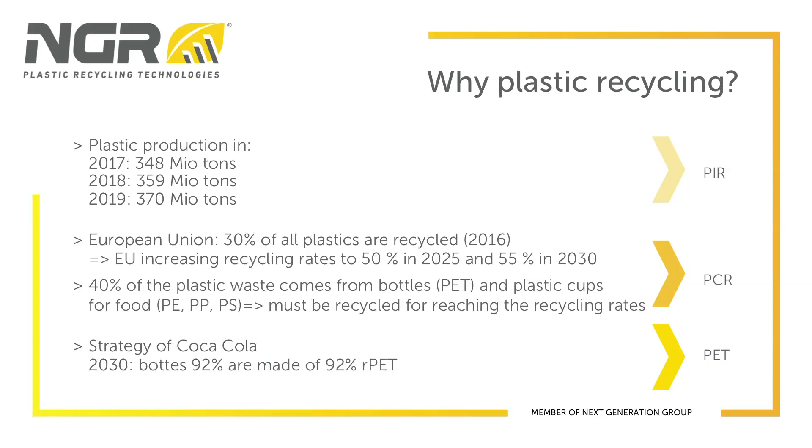Therefore, we believe that although there's a global COVID pandemic and the political focus is a little bit turned away from environmental issues, it is very important to talk about plastics recycling. The production of plastics during the past couple of years increased steadily, and it doesn't look like it becomes less, even though the European Union starts to ban straws and other one-use plastic products. We still have to work on the recyclability of these products.

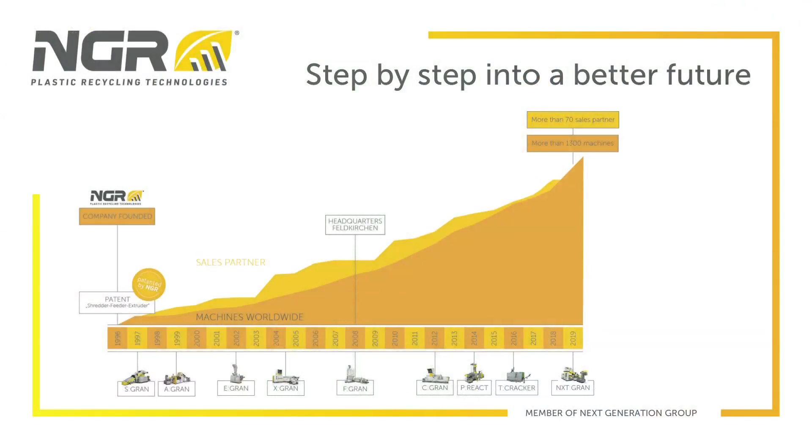From that time on, we developed 9 different systems for separate applications in the recycling industry. So beside industrial waste, post-industrial waste or PET recycling, we are focusing today in this webinar on the post-consumer segment. As already mentioned, NGR's headquarters is in Feldkirchen, Upper Austria. This is the place where all the machines are developed, designed, manufactured and delivered to our customers worldwide. Besides our headquarters, we have a subsidiary in the United States for customer care, sales and service, as well as in Malaysia and a sales center in China.

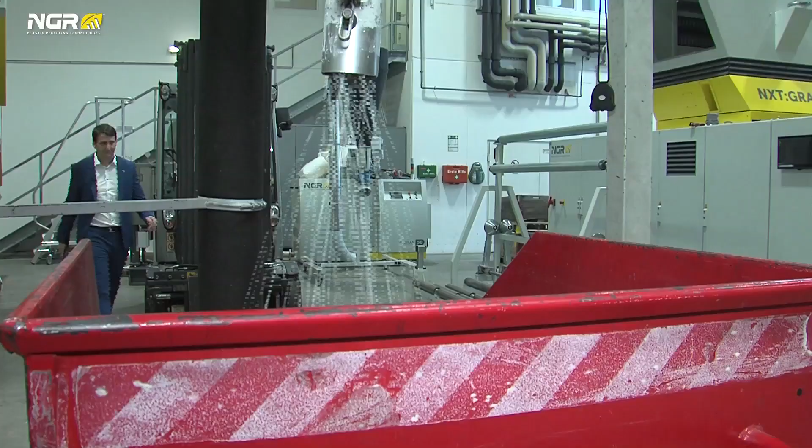We are now here at NGR's Post-Consumer Recycler Test Center. As mentioned before, NGR supplies a wide range of plastic machineries, which are split basically into 3 different segments. The first segment is the PET segment, where we have our specialized P-React, working with a liquid state polycondensation technology in order to enhance the intrinsic viscosity of PET and to clean the PET melt in order to achieve food gradability.

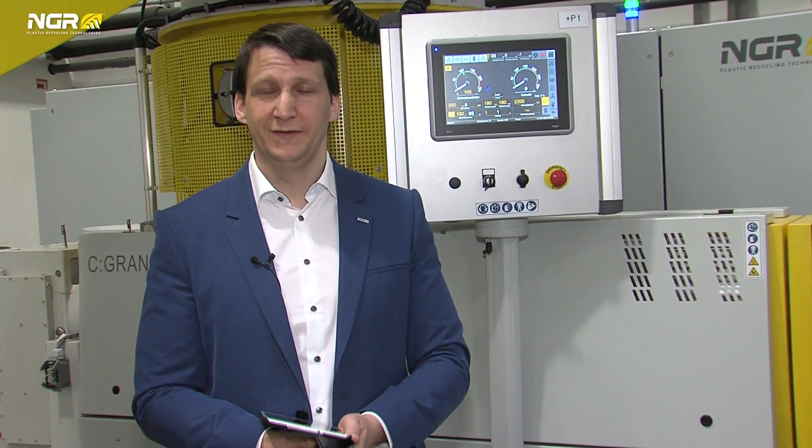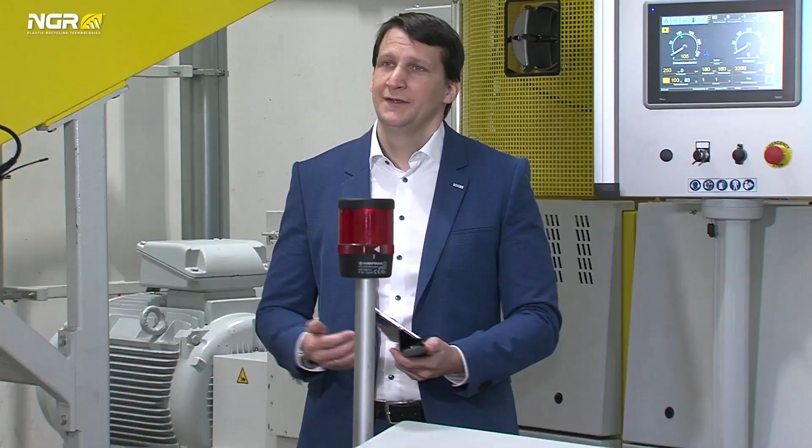The second segment is our post-industrial recycling segment, where we develop and manufacture machines specialized for in-house applications. This means if a plastic processing company producing films or other plastic products has a certain amount of in-house waste, these machines are used in order to recycle the in-house waste into high-grade pellets that can be reused for their own production, and the company therefore saves a lot of money and does something beneficial for the environment.

And the third sector is our post-consumer recycling segment, where we are talking about more detail today, where we have two different technologies available for the different unique demands of our customers.

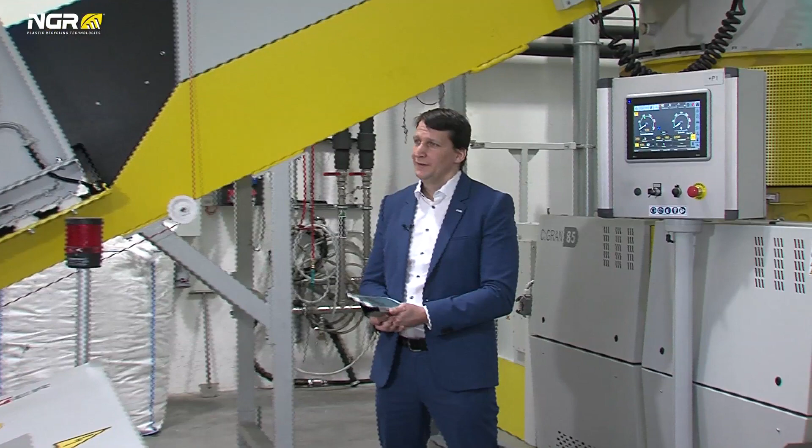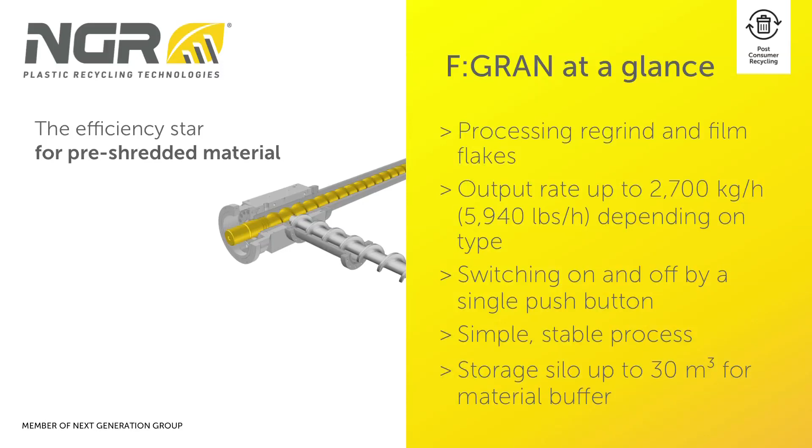The F-Gran series is equipped with a flake silo in order to store the flakes coming from a wash plant, followed by a feeding screw feeding the flakes from the silo into the recycling extruder, and then in the recycling extruder the material is upheated and homogenized in a very stable and simple way. The machine is beneficial for our customers as it is very easy to operate, and basically once it runs on its own. We manufacture machines up to a size of 2,700 kilos per hour for this type of machine.

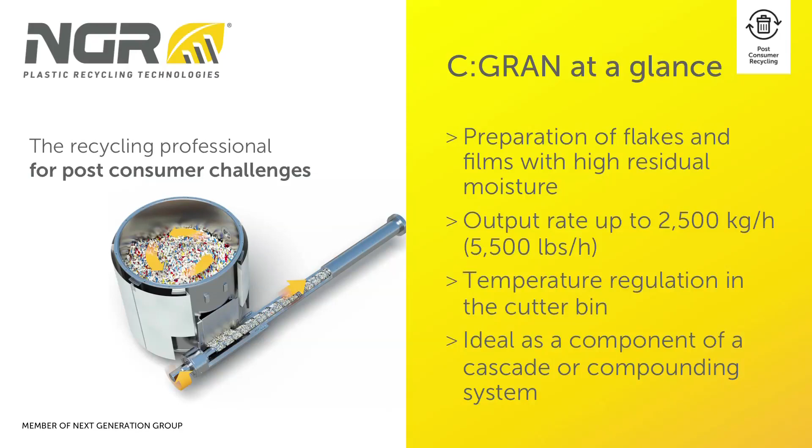The second technology is our C-Gran technology. It is a cutter compactor extruder combination equipped with a preconditioning unit that can handle even higher moisture contents of flakes coming from a wash plant. The preconditioning unit is first to handle higher moisture contents, and secondly to homogenize the material before entering into the extruder. This is exactly the technology we are talking about today. The machine series is available in several sizes and goes up to an output of 2,500 kilograms per hour.

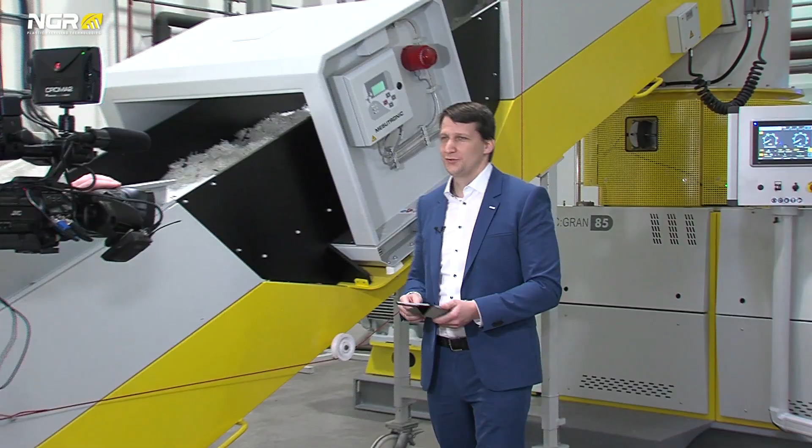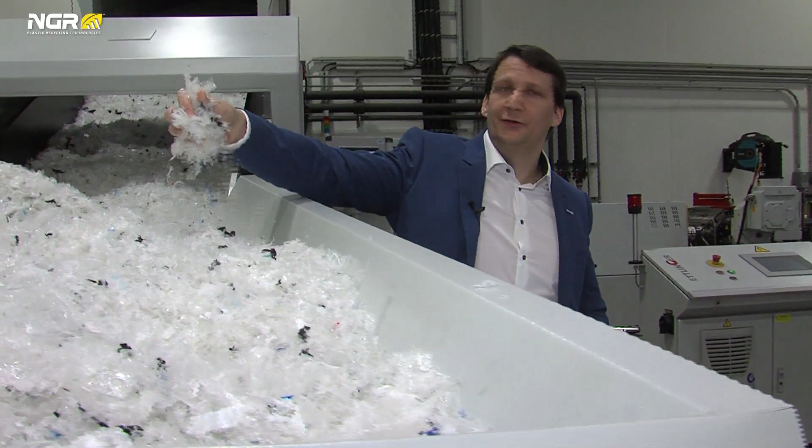As said before, the machine we are talking more detailed about today is our C-Gran technology, which is a special machine for post-consumer recycling requirements. It is equipped in our test center with a conveyor belt, having installed a metal detector, avoiding metal parts to enter into the machine, and therefore assuring a stable and constant production for our customers. The material we are recycling today are polyethylene film flakes coming from a wash plant of post-consumer origin.

The flakes are conveyed via the conveyor belt into our cutter compactor unit and have to pass before that the metal detector. In the cutter compactor unit, the preconditioning unit, the flakes are upheated and homogenized before entering the extruder.

Between extruder and cutter compactor unit, there's an electrical driven slide that controls the opening between these two segments and therefore controls how much material is entering from the preconditioning unit into our extruder.

By driving the slider with an electrical drive, we have the huge advantage for the operators that the results for the different materials to recycle can be reproduced every time, because you store all the setups you have made for one material on the HMI as a certain recipe.

The machine furthermore is equipped with a degassing zone on the main extruder, followed by a special filter, a venting extruder, and a pelletizing system. To these parts we will come a little bit later more detailed.

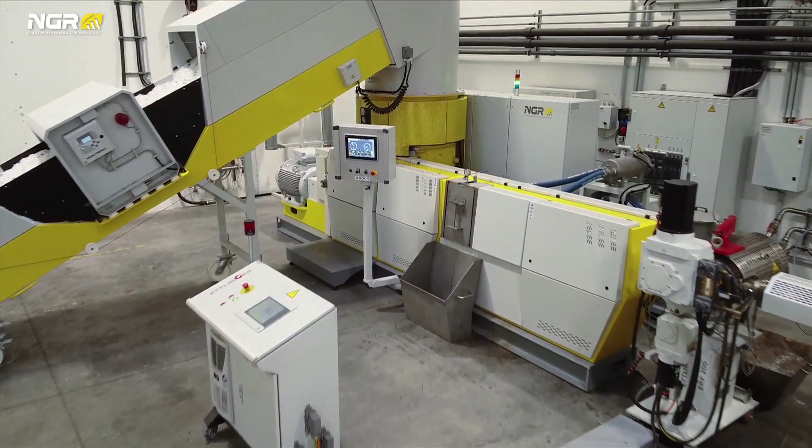Talking about environmental protection and reduction of global carbon footprint, our engineers always had the focus also on our own machinery and technology and the emissions probably coming from this. We see it as our responsibility to take care that the used recycling technologies are not only helping to protect the environment from the plastic waste, but also not to affect the environment by own emissions.

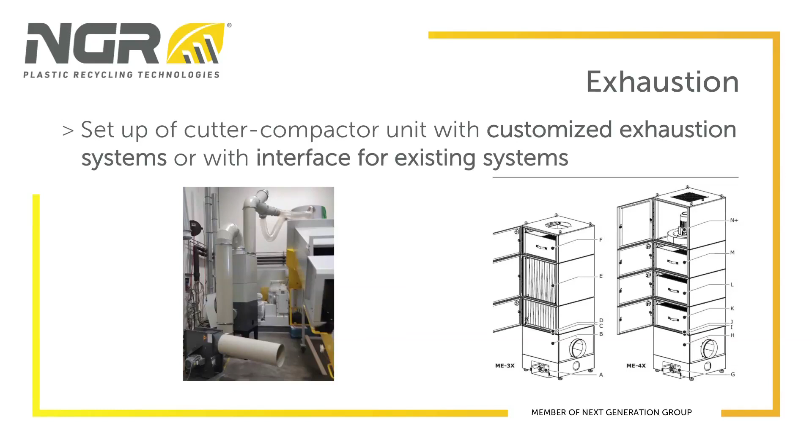Therefore, several different exhaustion systems were developed in our company. The simplest way would be just to suck off the fines which may occur in the cutter compactor unit and collect them in the dust bag, but there are also alternative filters like you see on the slide here, which can be equipped with aluminum mesh filters, self-draining filter cassettes coalescing the mist into droplets, or also even HEPA filters.

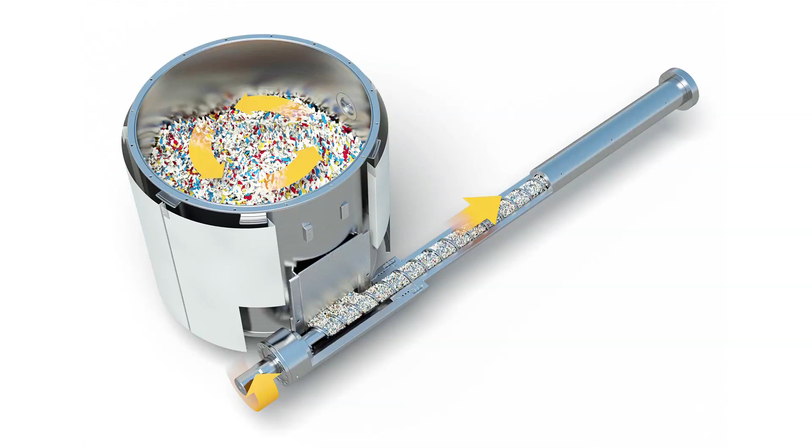Talking more detailed about different degassing solutions, I would like to introduce you to my colleague Robert Meingasner from Process Engineering, who will give us more insights about this technology.

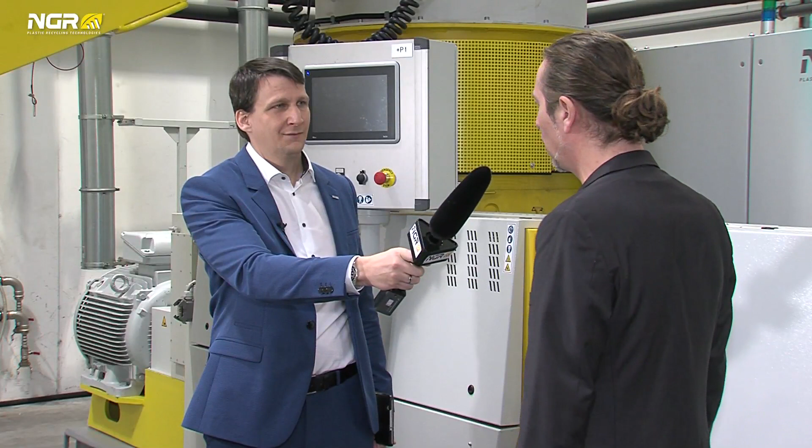Robert, why is degassing so important during a recycling process? In general, our degassing units and its pumps are used to extract volatiles from the melt, which occur during the melting process. Volatiles occur in form of different gases, moisture, or air.

So how do these volatiles get into the melt? The volatiles actually get into the melt by feeding material which has different contamination or some moisture in the material. During the melting process, it's enclosed in the melt itself, and by our vacuum systems and the special design of the screw in this area, the gases get released and get extracted by the vacuum systems.

Sounds like the degassing system is a very important part of the machine in order to achieve high quality pellets during the recycling process. Can you give our audience a little bit more insights about the different executions and technologies we can provide for that system to our customers?

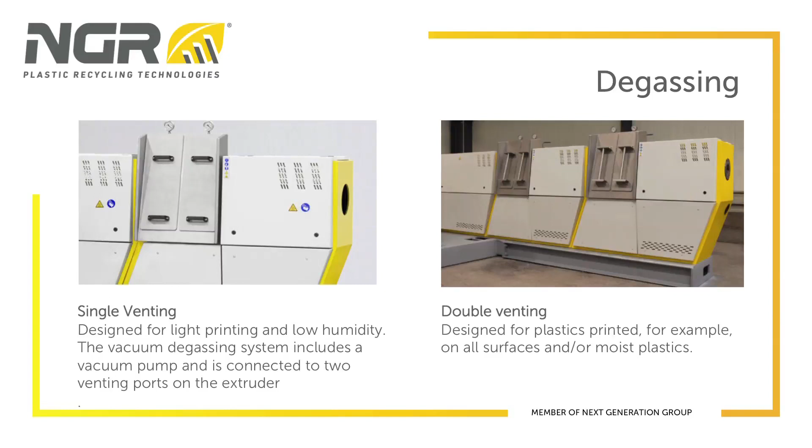Depending on the contamination of the melt, meaning the in-feed material, different degassing systems are available. In general, there are single and double degassing systems available for our main extruder, which can be installed on a modular base. As explained before, NGR has different degassing systems available for the different requirements of our customers.

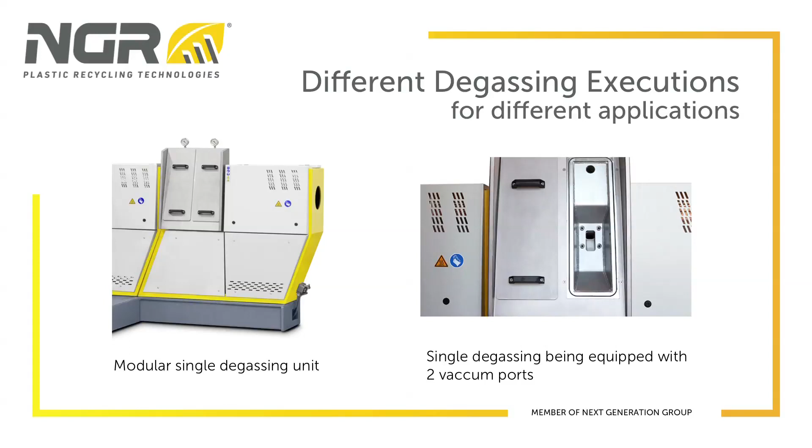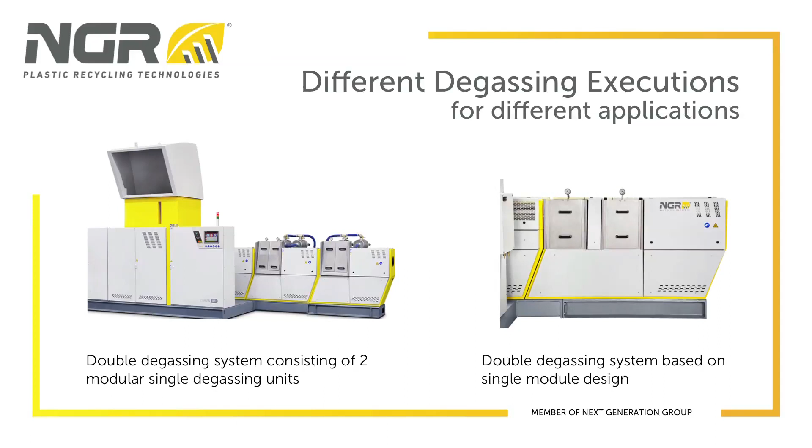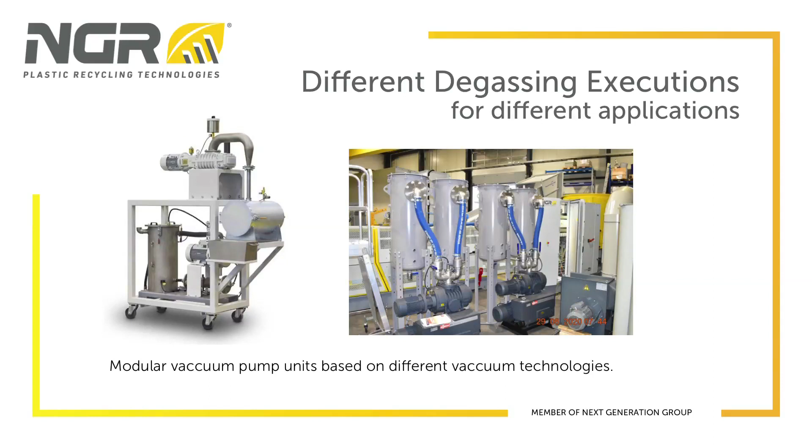As you can see on these slides, our degassing solutions are based on a modular design. Therefore, we can decide based on contamination and printing level of the recycled material which module will be required for the specific customer needs. This modularity applies to the degassing module itself, but as well for the vacuum technology creating the vacuum, and also for the screw design, which can be adapted for each degassing execution in accordance to the customer requirements in the same way.

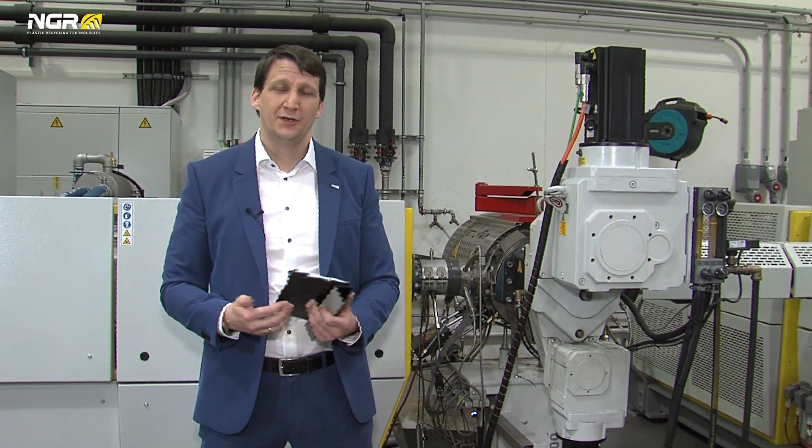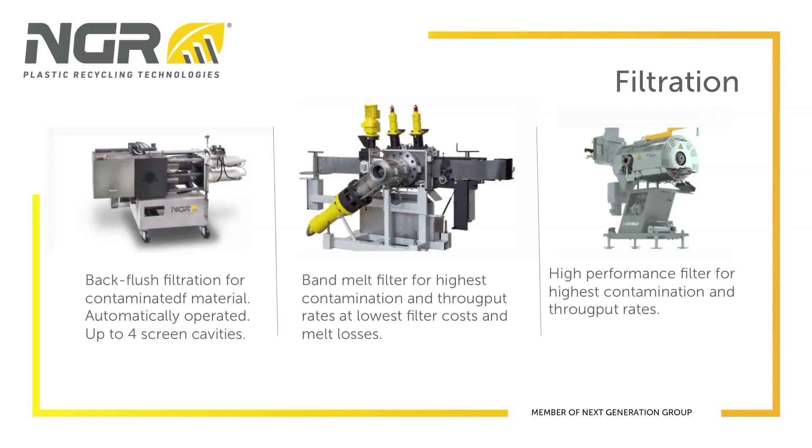At NGR we have the possibility to install different types of filters on our machines. We can use, for instance, automatic band melt filters with a maximum filter surface of 3,200 square centimeters. We can also install high performance filters for high contaminated waste with up to 18% contamination in weight in form of solid particles such as elastomers, rubber, glass, wood, paper, and many more, or simple double piston screen changers with or without backflush function.

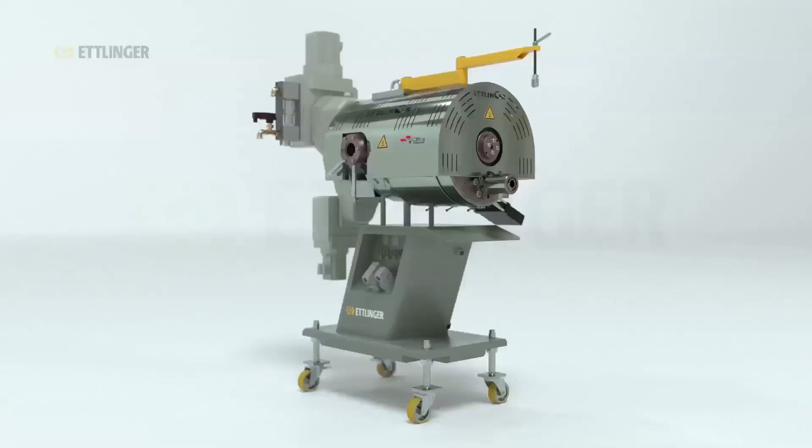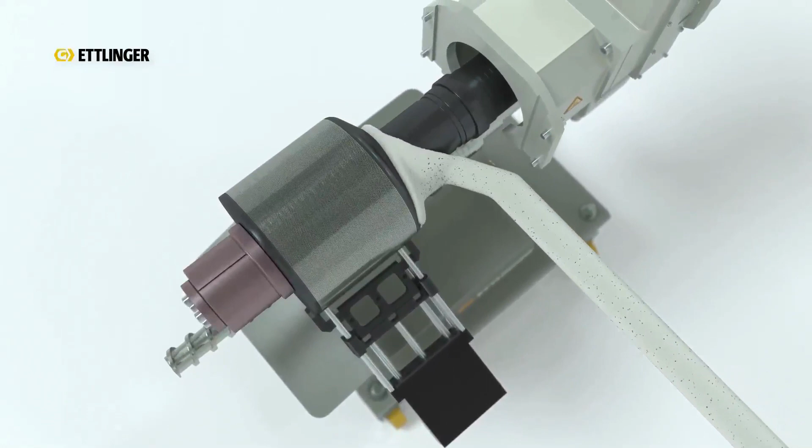The video now shows the high performance filter. At this filter, plastic melt is flowing from the outside to the inside through a rotating filter drum with millions of small conical holes. These conical holes get the contaminants out of the melt and keep it on the filter surface.

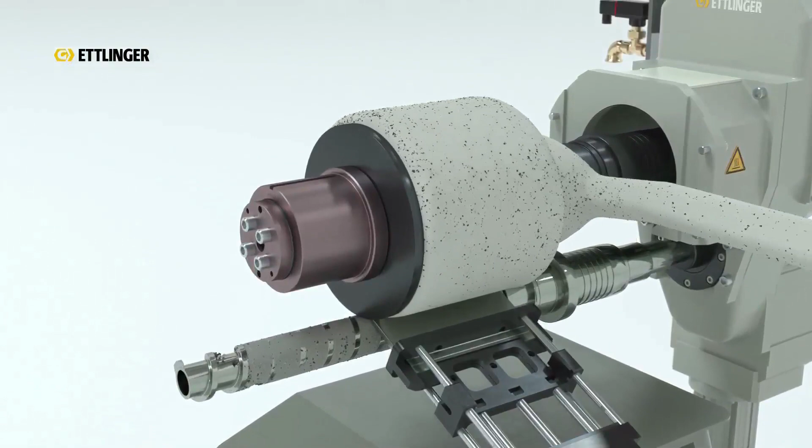Later on, these contaminants are removed by a scraper. Here you can see the scraper where the contaminants are continuously fed to the discharge screw and immediately evacuated from the process. The rotational speed of the filter drum and the discharge screw can be set independently from each other depending on the amount of contamination, assuring a stable process without pressure spikes and assuring a low melt loss.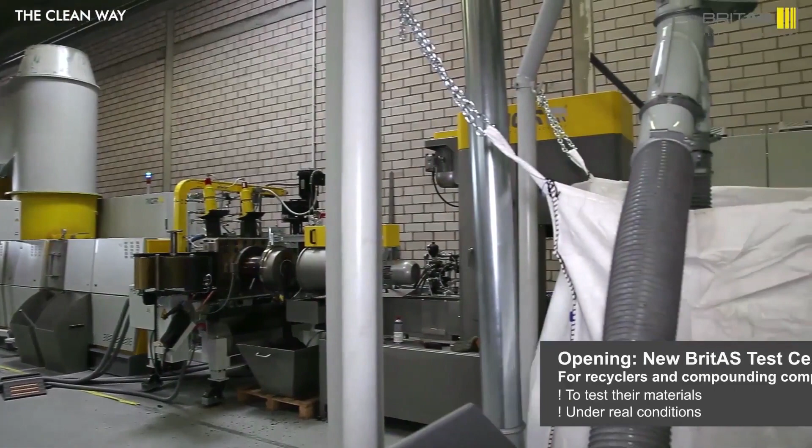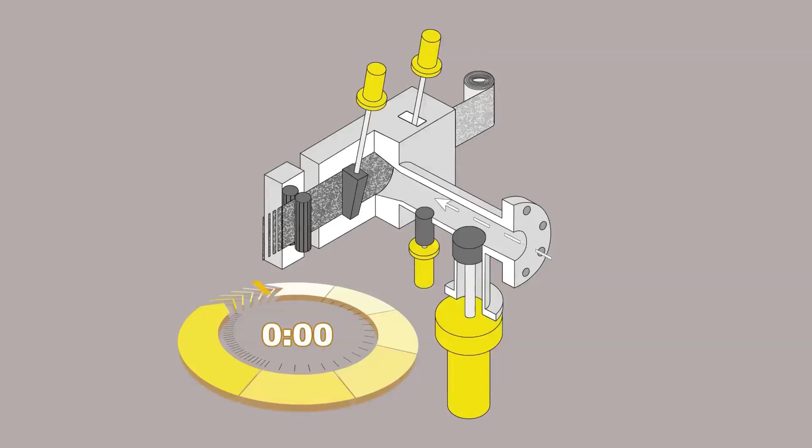The filter is in normal operation connected to the extruder. Once the filter band is clogged with contaminants, the shut-off valve automatically closes the connection between filter and extruder, still with the extruder in full operation, feeding its material into a piston accumulator situated before the shut-off valve.

Being disconnected from the extruder, the two clamps keeping the filter band in place open up and allow the filter band to move pressureless through the filter, bringing new material into production.

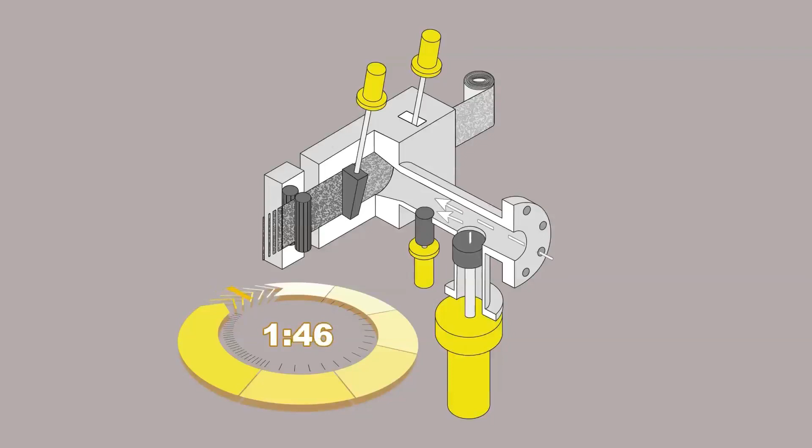After this movement is finished and the clamps are closed again, the shut-off valve reopens the connection to the extruder and the piston accumulator empties the stored material through the filter again. By doing so, material losses are reduced to the possible minimum.

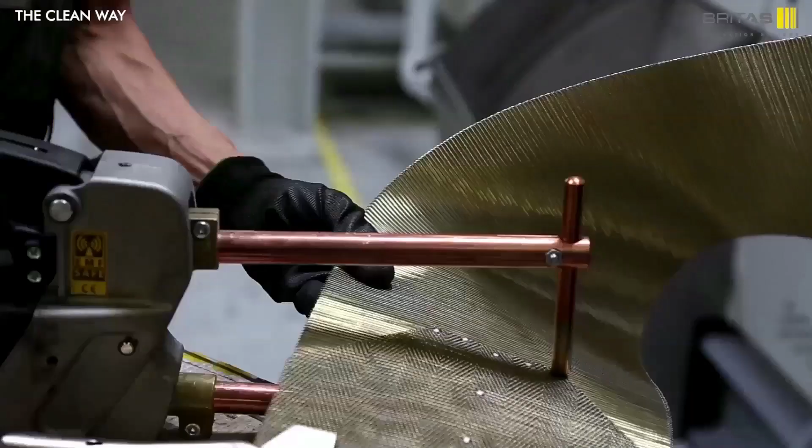If the filter band is empty, a new band is welded to the old one and production can continue without any interruption.

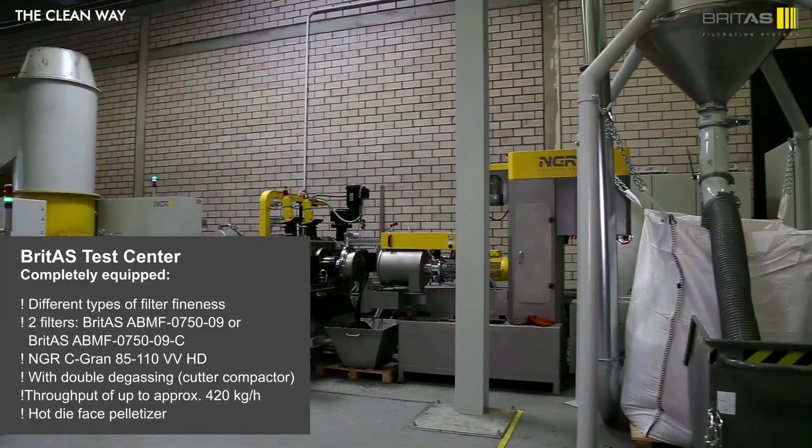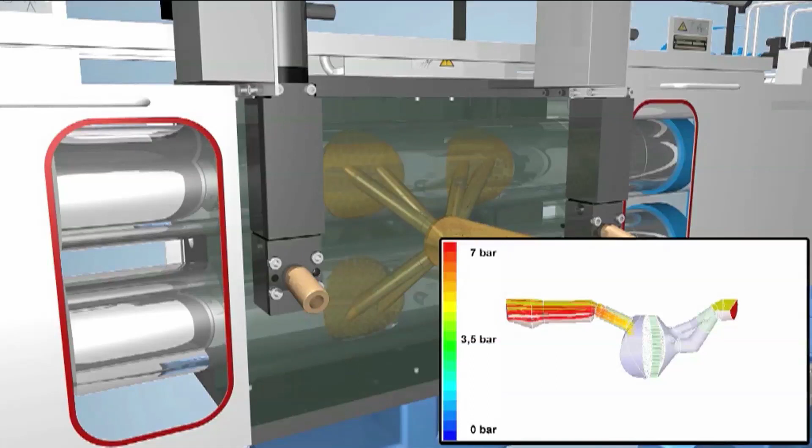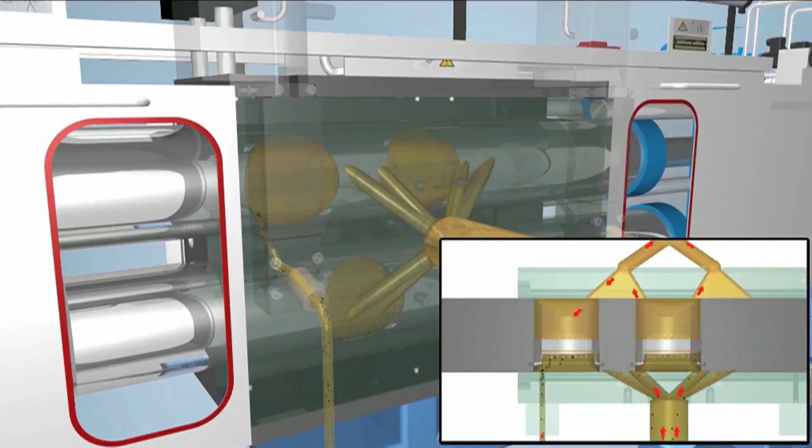Once a certain pressure is reached, meaning the filter screens are clogged, one piston after the other moves into a backflush position, where the screens get backflushed by clean melt and cleaned for further use. After a defined number of backflush processes, the piston moves into the screen change position, where the screen is replaced by a new one.

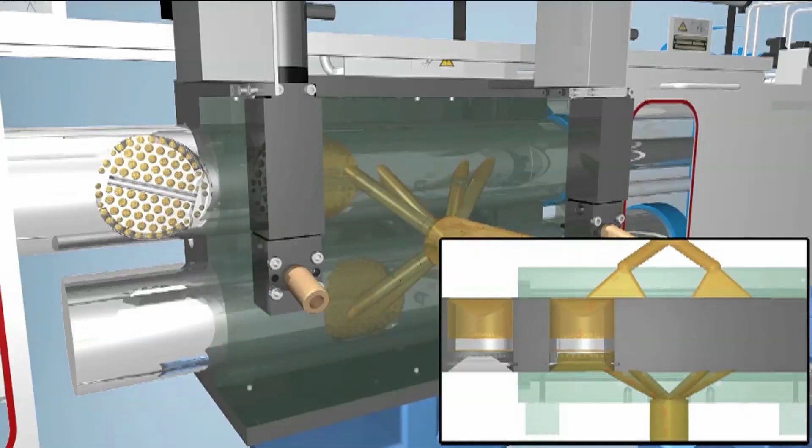While moving back into operation position, the filter stops in order to pre-fill and vent the filter cavity with melt, avoiding any air getting into the process, and the screen can get back into production.

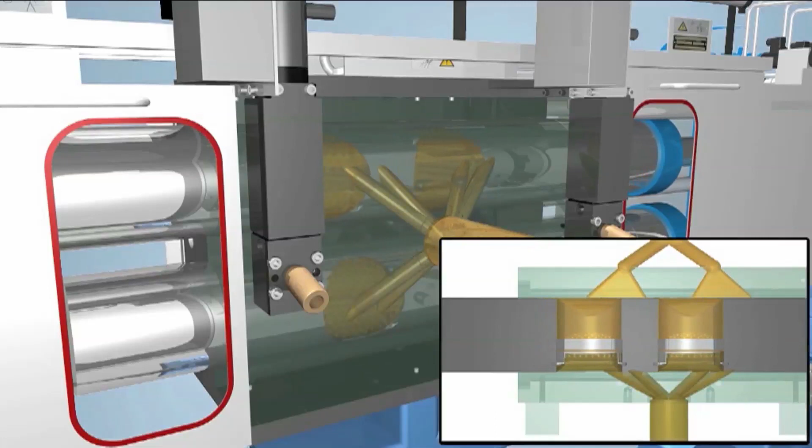In this case, for the webinar, we have installed a high-performance filter for highly contaminated materials. All these filter types and screen changers can also be combined together. In the video of a Turkish customer, you can see a combination of an automatic band melt filter combined with a high-performance filter, which was necessary to recycle the highly contaminated material of the Turkish customer.

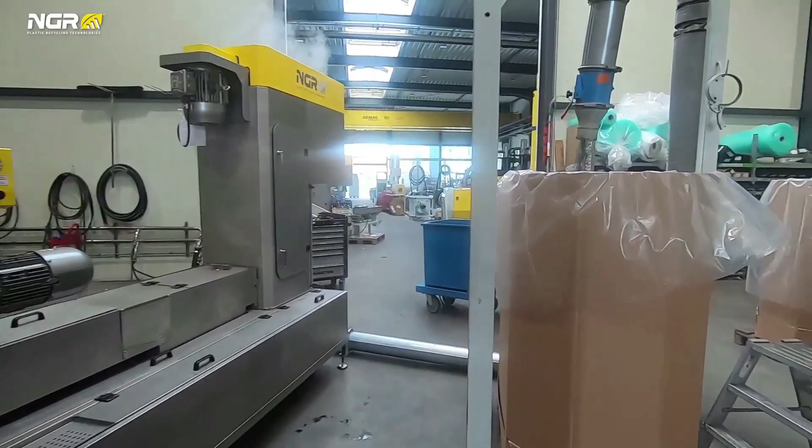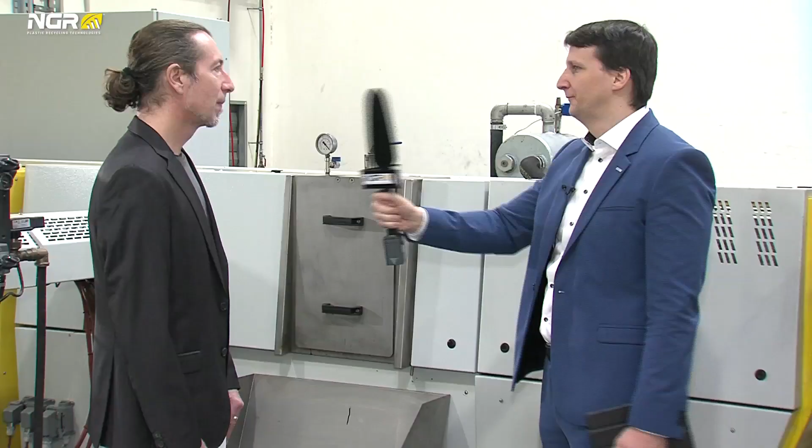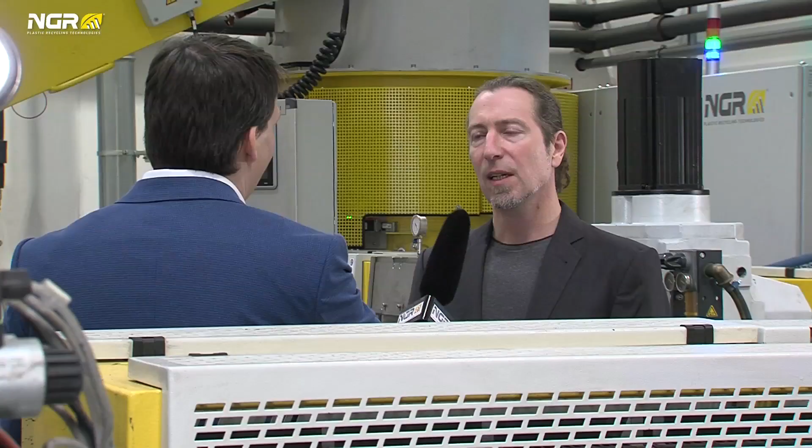So if the main extruder is already equipped with degassing systems, why do we need an additional venting extruder? The venting extruder provides additional degassing performance, especially if it's installed after a filtration process. Gases that occur in the filtration process can be perfectly removed by the venting extruder.

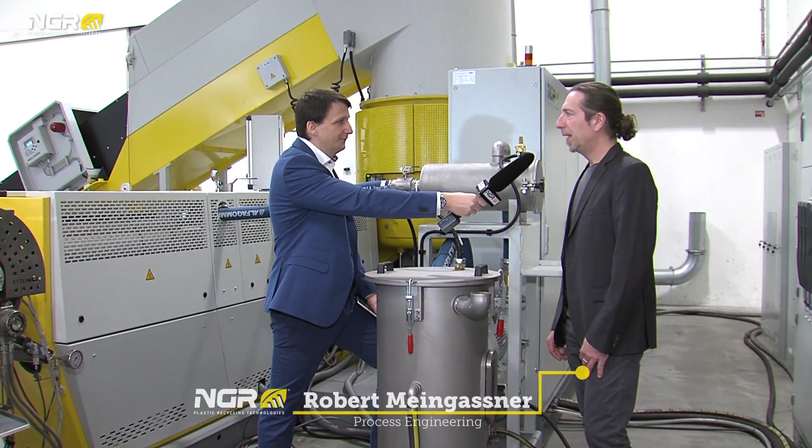So how do you decide which vacuum systems you choose for the recycling machine? Depending on the application and its necessary vacuum and degassing performance, we use different configurations of vacuum pumps. In general, we distinguish between single or multi-stage pump configurations, respectively water-ring pumps or dry-running vacuum pumps.

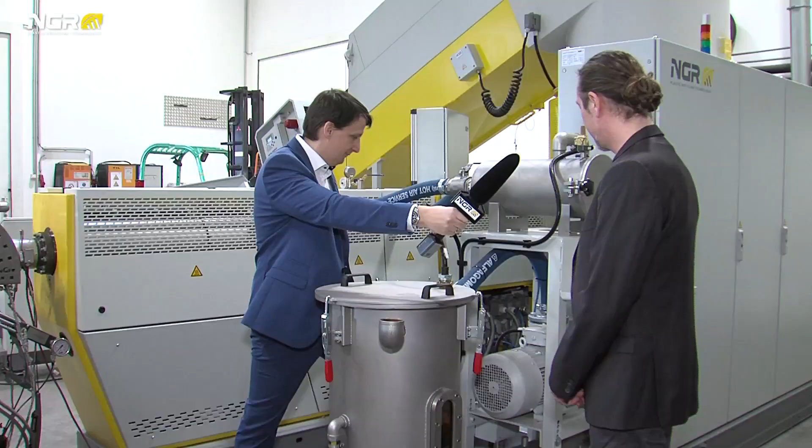So what exactly do we see here? What we see here is our single-stage vacuum system combined with our closed water circuit, which is designed to reuse the process water in a closed loop.

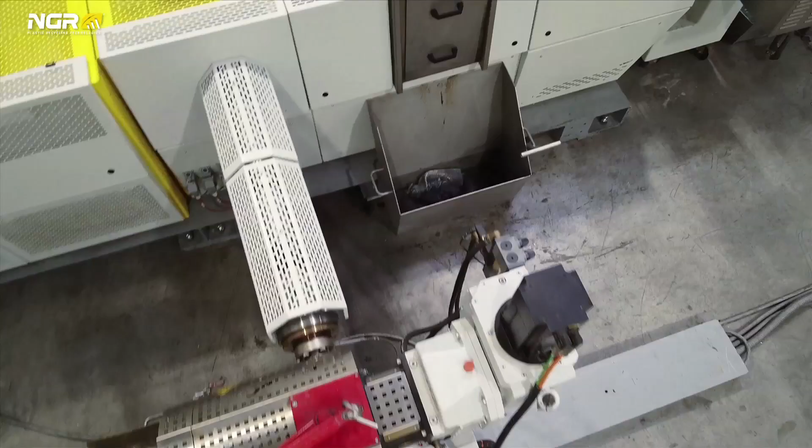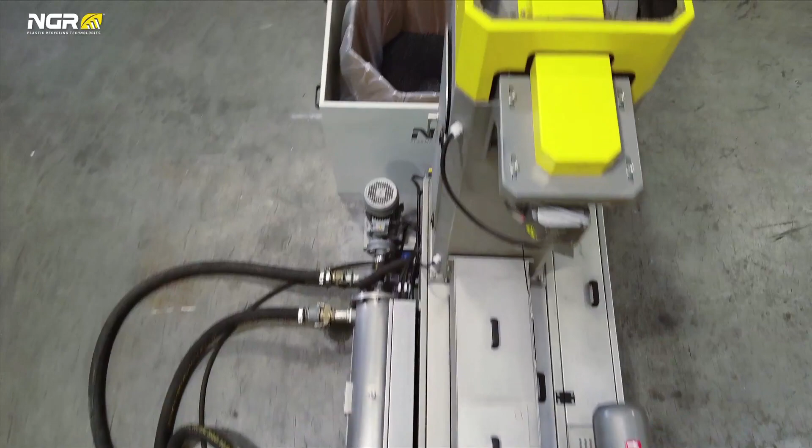Our machine today is equipped with a venting extruder, as you already know, and after this venting extruder we have a fine filtration in the form of a double piston backflush screen changer, followed by our hot die face water ring pelletizing unit, equipped with a pneumatic system in order to maintain and set the right pressure of the pelletizer knives against the die plate.

This assures a very long lifetime of the pelletizing knives. The complete system is equipped with a closed water circuit and a tank system where the pellets are cooled down to a temperature allowing you to collect them in a big bag or silo storage. The water used in this closed water circuit system is recirculated through a tubular heat exchanger in order to maintain a low water temperature.

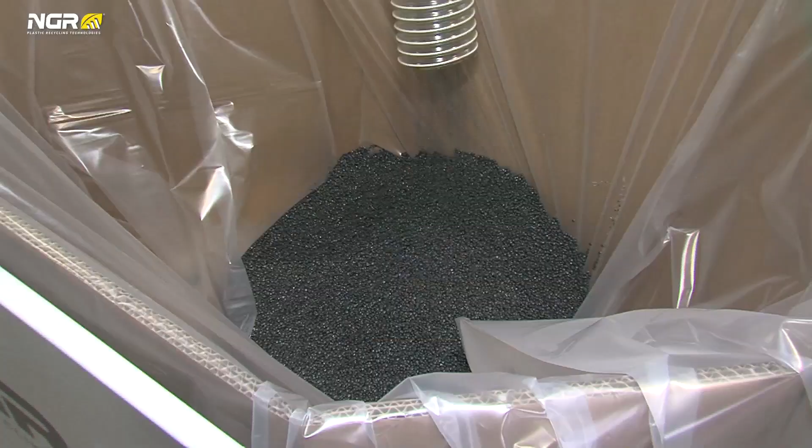The last part of the pelletizing unit is a centrifugal unit where the pellets are transported from the bottom of this part to the top, and by the centrifugal action of this system the pellets are immediately dried and can be reused for further use in a film extruder or other plastic extruders.

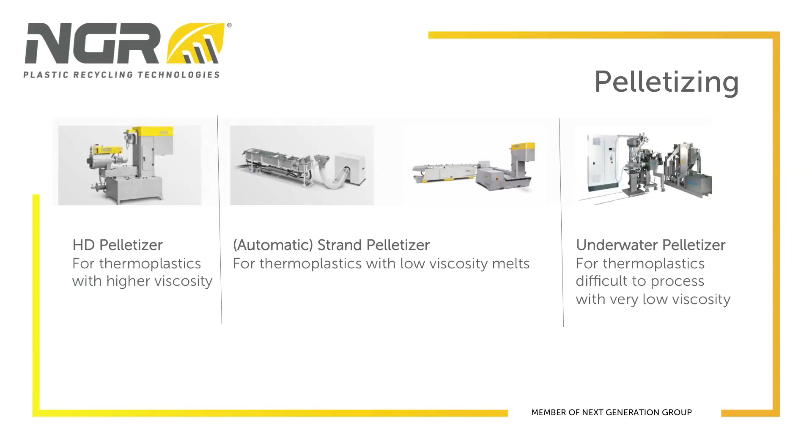Beside water ring pelletizing units, NGR can also provide underwater pelletizers, strand pelletizers, or automatic strand pelletizers, simply depending on the material properties of the customer. In case of different MFI values or different viscosity levels, we would choose the right pelletizing unit for the application.

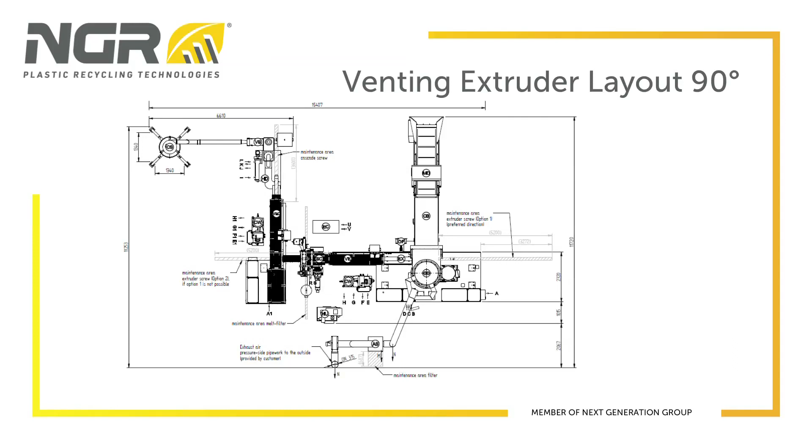Additionally, our venting extruder can be set up in different directions, like in this case at 90 degrees to the main extruder, but also, for instance, in line with the main extruder.

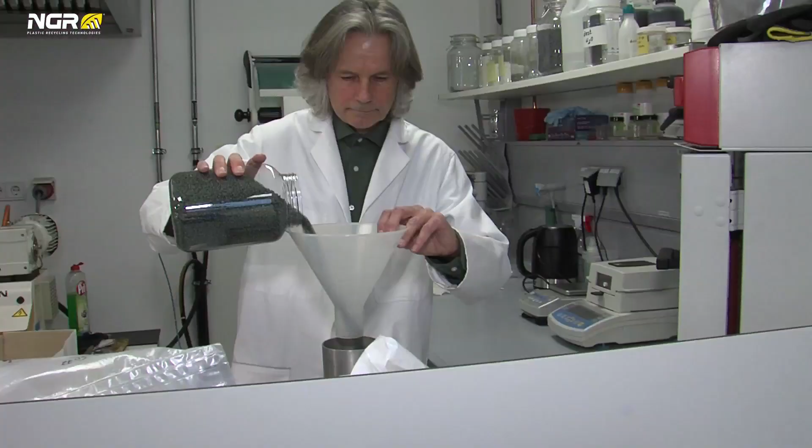Beside customer trials, NGR can also provide material analysis to our customers, especially comparing input material qualities to the quality of the recycled pellets after the recycling process. We are equipped with a laboratory including DSC analysis, an MFI testing device, a rheometer, a thermoscale, IV measurement, and other devices, especially our multi-inspection unit, which is a combination of a Collin cast film line and a multi-inspection device from Next Generation Analytics that creates a small sample of cast film and analyzes the optical and mechanical properties of this film.

As mentioned before, the production of plastic products is growing every year, and the recycling quotas are being increased by the European Union, other countries and unions year by year. For this increasing demand, NGR is preparing itself with its new production factory 2, ready for assembling in the first quarter of 2022.